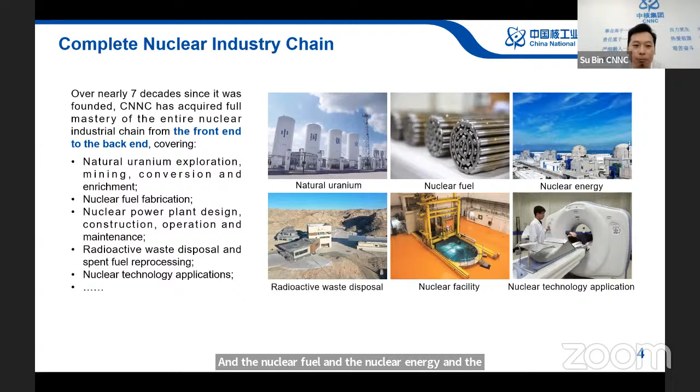For nuclear power development, CNNC has constructed many types of reactors from generation 2 to generation 4, including CNP300, CNP600, CNP1000, HPR1000, VVER, AP1000, CANDU 6, ACP100, and HTR-PM. For CNP300, CNP600, CNP1000, HPR1000, and ACP100, HTR-PM, it is from CNNC. CNNC has totally intellectual property and design of these reactors.

VVER is from Russia, and the AP1000 is from American. CANDU 6 is from Canadian.

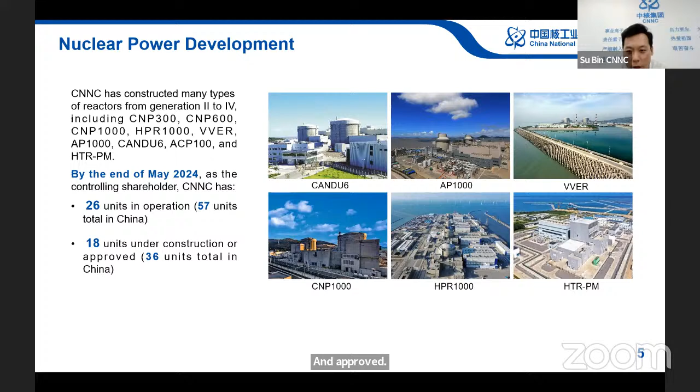So up to now, by the end of May 2024, as controlling shareholder, CNNC has 26 units in operation, out of 57 units totally in China. Under CNNC, we also have 18 units under construction and approved, out of 36 units totally in China. As a state-owned company, and on behalf of the China government, for nuclear development, we have adopted a 3-step strategy.

The 3-step strategy for nuclear energy development is thermal reactors, to fast reactors, to fusion reactor. You can see that we have 3 steps.

First is the thermal reactors, which use uranium-235, mature technology, and broadly constructed. The second is fast neutron reactors, which use uranium-238, which has a high efficiency utilization rate of uranium resources, and the spent fuel is greatly reduced.

The third step is fusion reactors. Fusion reactors have the highest thermal efficiency and no risk of accident, such as supercritical or fuel melting. We used to call the fusion reactor a small sun.

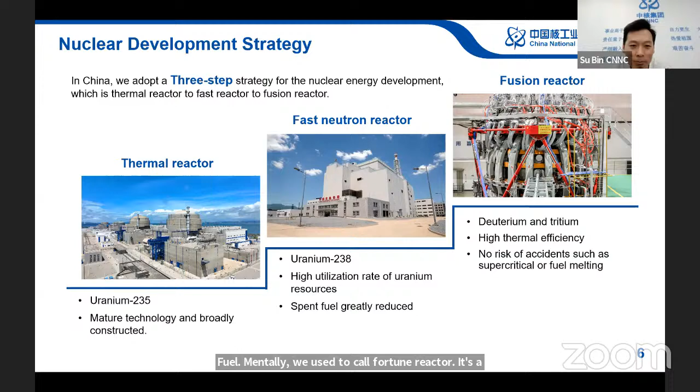CNNC Overseas was founded on April 25th, 1983. The name is China National Nuclear Corporation Overseas, a wholly owned subsidiary of CNNC. It is a leader and designated platform specialized in overseas marketing development of the complete nuclear industry chain.

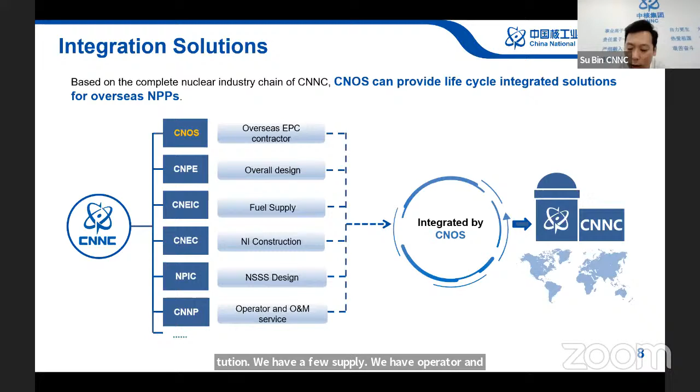So we have an integrated solution. Under CNNC, we have a construction company, a design institution, fuel supply, and operator and services. So we can provide complete services for our international partners.

Over the past 40 years, CNNC has successfully exported 1 research unit and 6 nuclear power plants in the international market. Especially, we have exported 6 units in Pakistan, and we have built 2 nuclear bases in Pakistan. The total installed capacity of nuclear in Pakistan is 3,505 megawatts, and the generation capacity is around 20 to 23% of total energy.

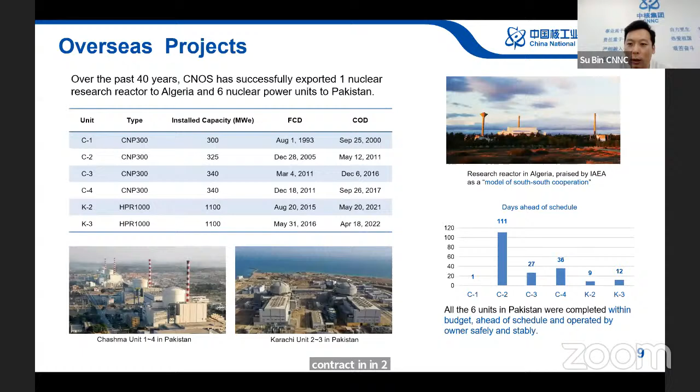Also, by the way, we also export 1 unit in Argentina. We signed a contract in 2022. And also we have research reactors in Algeria, Nigeria, Iran, Pakistan, and other countries.

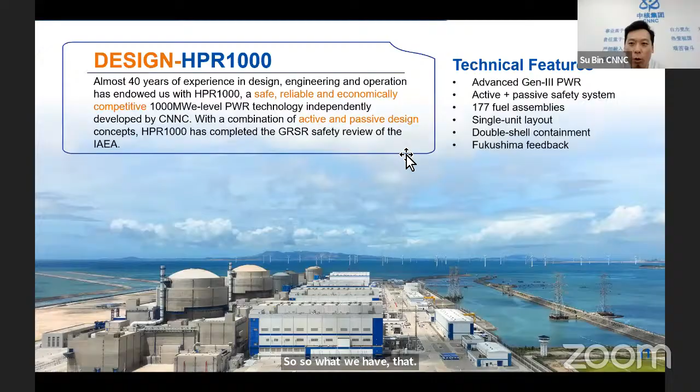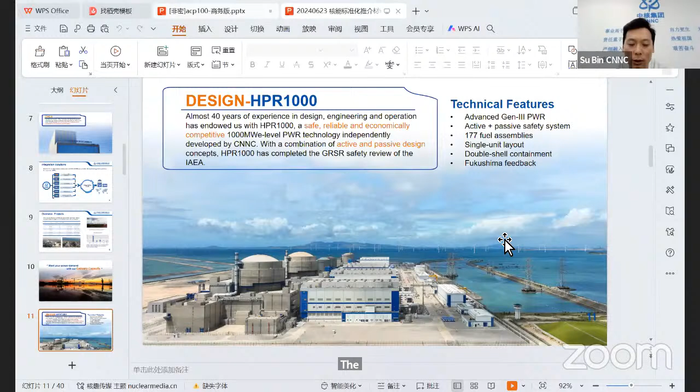So what we have is that we can provide a big unit like HPR1000. The designed capacity is around 1,200 megawatts, and we also have a successful demonstration plant in China and overseas.

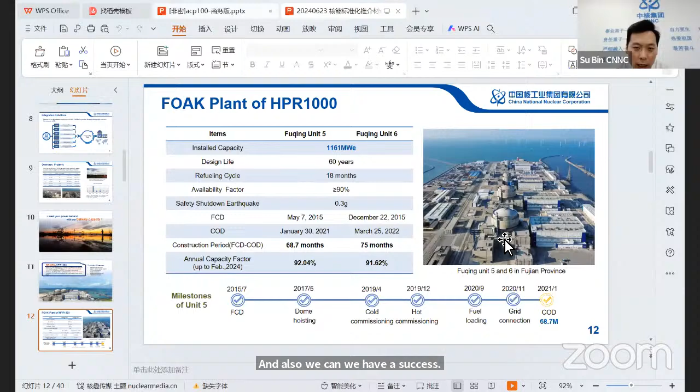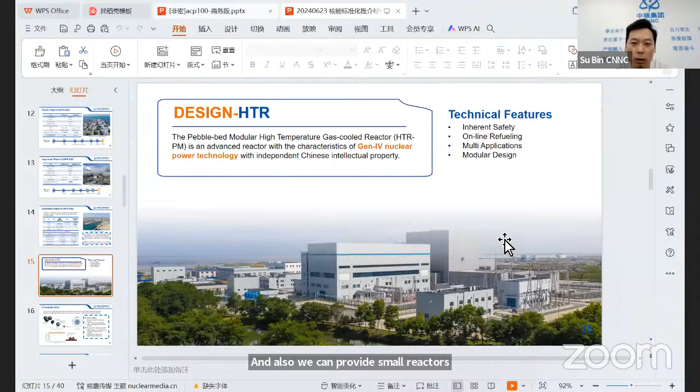We can also provide small reactors like HTGR. We have a demonstration plant in China, in Shandong province. And also we have ACP100.

ACP100 is basically a new generation of small and elegant NPP developed.

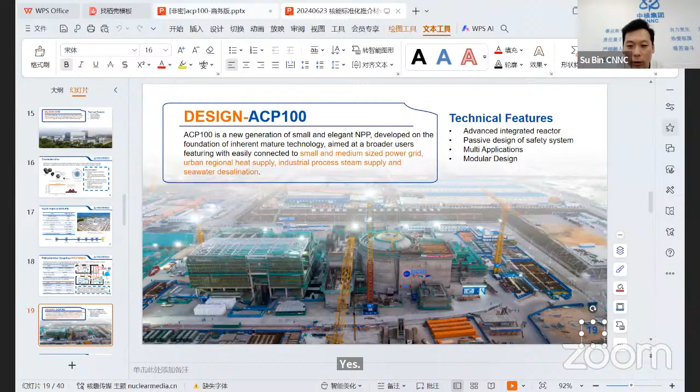Okay, so for ACP100, it is a new generation of small and elegant NPP developed on the foundation of inherent mature technology, aimed at broader users, featuring easy connection to small and medium-sized power grids, urban region heating supply, industry process steam supply, seawater desalination, and even hydrogen production.

For ACP100, I have to emphasize that it is the first SMR in the world approved by the IAEA. It is constructed in China, in Hainan province, and this SMR is going to get commercial operation by the end of 2025. Currently, it is under the commissioning stage.

For the SMR technology features, we have multiple technical features. The first is advanced integrated reactor. Second is a passive design safety system, which also has multiple applications and modular reactors.

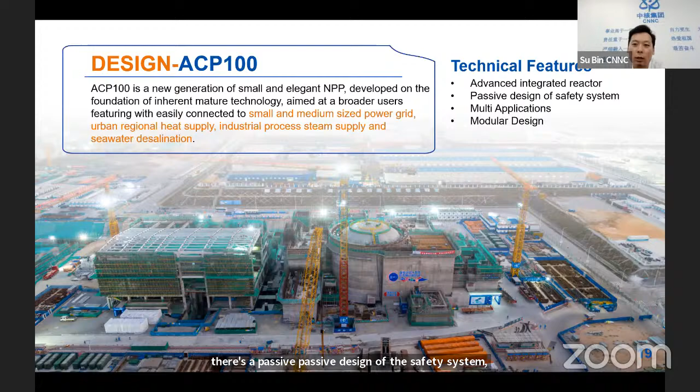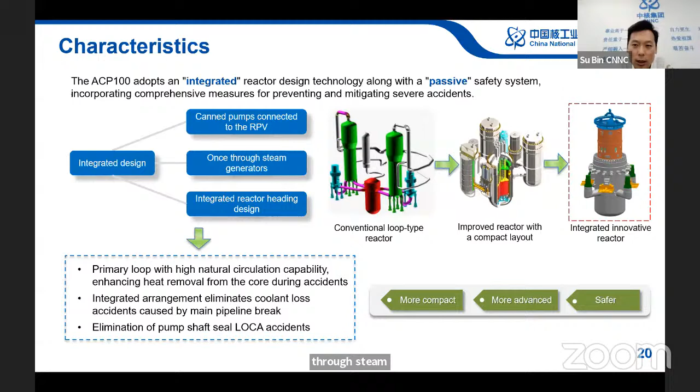So here, for the SMR ACP100, it adopts integrated reactor design technology along with the passive safety system, incorporating comprehensive measures for preventing and mitigating severe accidents. You can see here it is an integrated design, with the canned pump connected to the RPV, and a once-through steam generator in an integrated reactor heading design. You can see all of the design features here.

For the demonstration plant of ACP100 in China: installed capacity is 125 megawatts. Design life is 60 years. Fuel refueling cycle is 24 months, meaning once you fill in the fuel, you can continue running for 24 months. And the availability factor is more than 90%.

Safety shutdown earthquake design is 0.3 G. The FCD time, FCD being the first concrete date, for ACP100 in China in Hainan started from July 13th, 2021. The planned COD, or commercial operation date, is December 2025. The construction period is around 53.5 months.

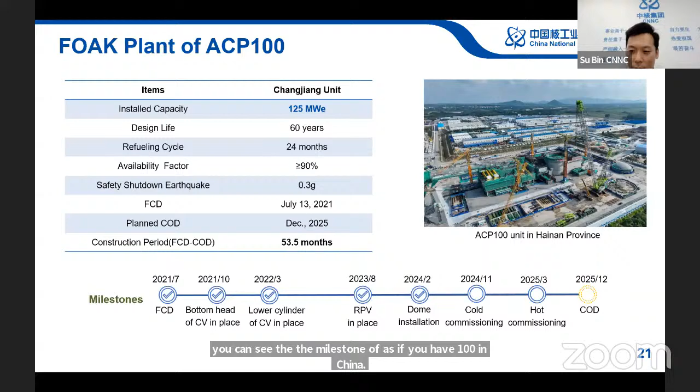You can see the milestones of ACP100 in China, starting from 2021, ending in 2025. For the function applications, ACP100...

For overseas projects, based on our experience in China and our nuclear power construction experience in foreign countries, we have concluded reference information for overseas ACP100. For a single unit, the construction period is 48 months, and for 2 units, the construction period is 60 months. The capital cost of a single unit starts from 8,000 to 10,000 US dollars per kilowatt, and for 2 units, the cost is around 6,000 to 8,000. The plant land size for a single unit is 25 acres, and for double units is 35 acres.

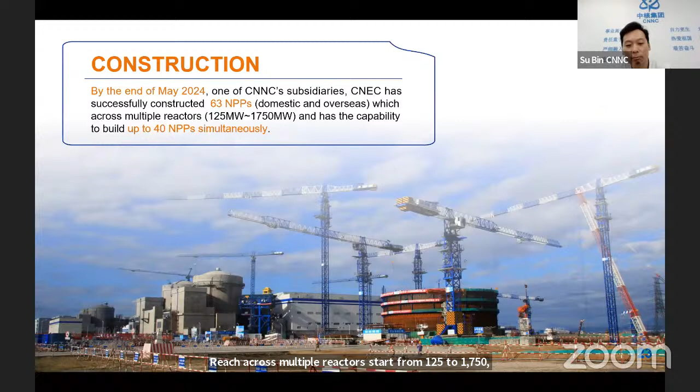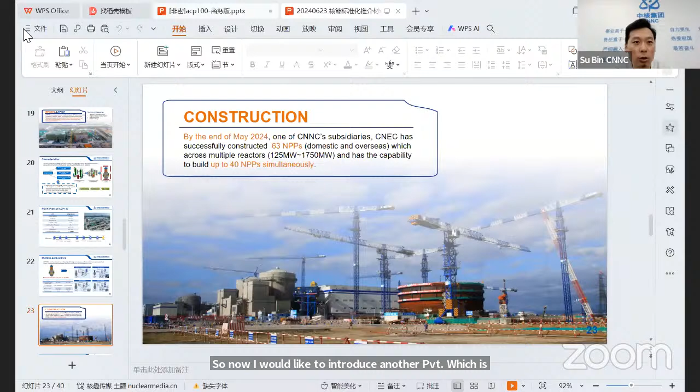Now I would like to introduce another presentation, especially focused on the ACP100. For the SMR ACP100, as we all know, the ACP small modular reactor is emerging as the future for nuclear industry development.

We have a common understanding that, given the global growth in electricity demand and traditional energy challenges, there is a need for carbon peak, carbon neutrality, and clean, low-carbon energy solutions to address traditional energy challenges. The IAEA, International Atomic Energy Agency, has proposed SMR as a key solution for the global energy transition, which can address global energy challenges through small modular design.

China is the first country to construct a small SMR in the world, symbolizing China's commitment to innovation. This marks a crucial breakthrough for China in the field of nuclear energy, setting a historical record for global nuclear energy development.

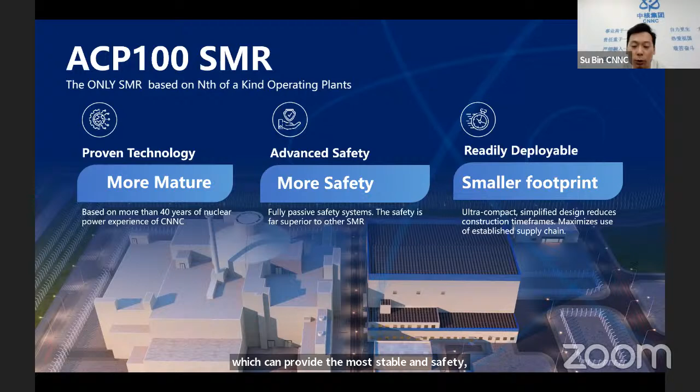For safety, the SMR has a fully passive safety system with high efficiency, which can provide the most stable and safe energy, and serves multiple purposes for both the country and the city.

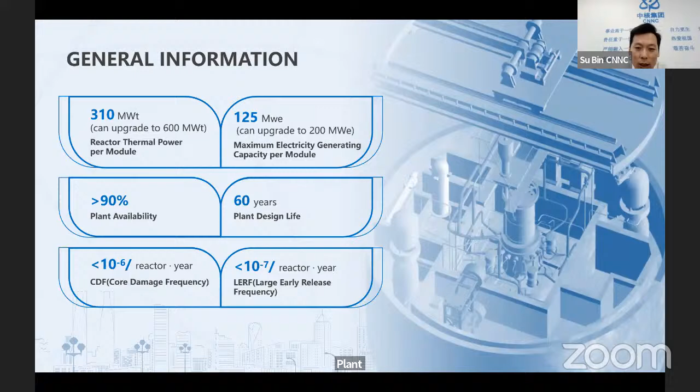We can see the general information for SMR, giving you a better understanding of design capacity, design life, plant availability, as well as core damage frequency and large early release frequency.

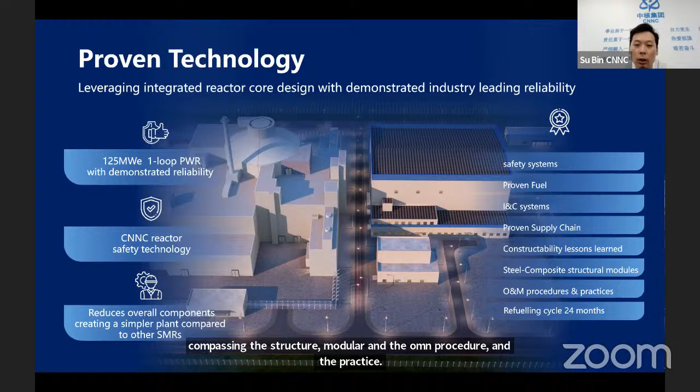This is the layout of SMR with relevant parameters. We can see the safety system and proven fuel, I&C instrumentation, proven supply chain, constructability lessons learned, steel composite structure, modular design, and O&M procedures and practices, with a refueling cycle of 24 months. This covers the basic specifications of the SMR.

As we can see, the design adopts an integrated design. For the ACP100, it has an integrated layout instead of a loop type, with the main pump directly connected to the reactor pressure vessel. The nuclear steam supply system is integrated into the reactor module, with an integrated head package design. The CRDM, pressure vessel, reactor internals, and canned motor pump are all mature technology.

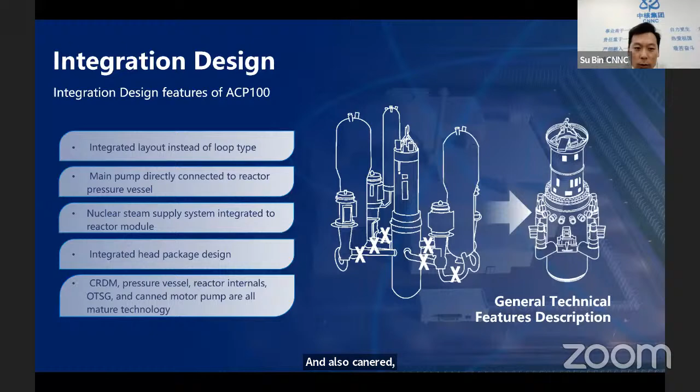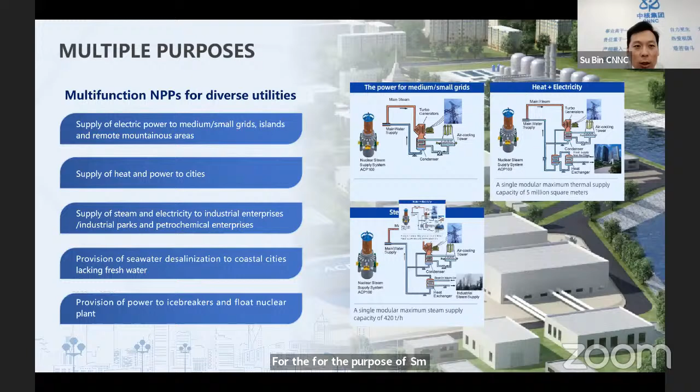For the purpose of SMR, we are content multiply purpose, as we can say multifunction NPP for diverse utilities: supply of electric power to small grids, islands, and also remote mountainous areas; supply of heating power to the city; supply of steam and electricity to industry enterprises and industry parks; and coupling with petrochemical industry enterprises.

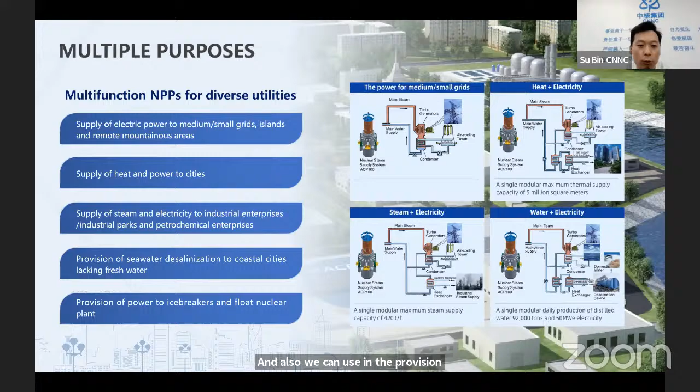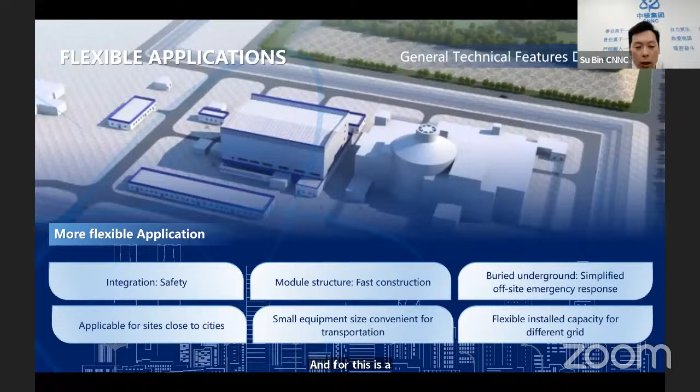And also we can provide seawater desalination to coastal cities and island cities lacking fresh water. And also we can use it in the provision of power to icebreakers and floating nuclear plants. So this is a flexible application for the SMR.

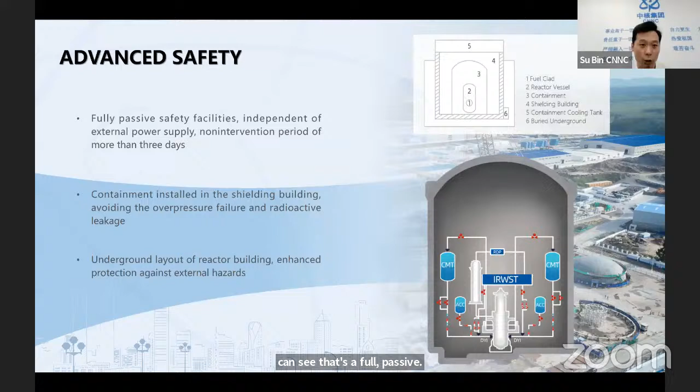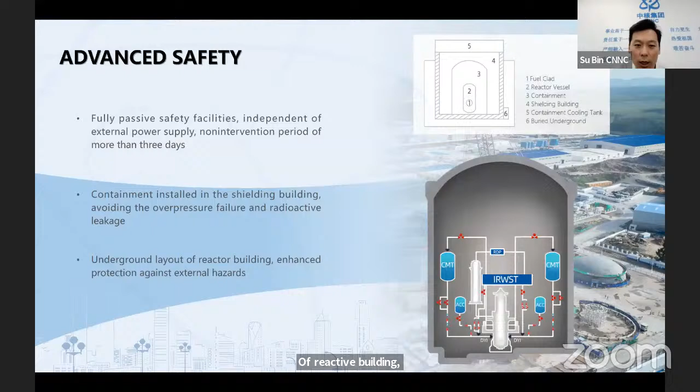Next, I would like to introduce the most advanced safety. You can see full passive safety facilities, independent of external power supply, and a non-intervention period of more than 3 days, and the containment installed in the shielding building avoids overpressure failure and radioactive leakage. And the underground layout of the reactor building enhances protection against external hazards.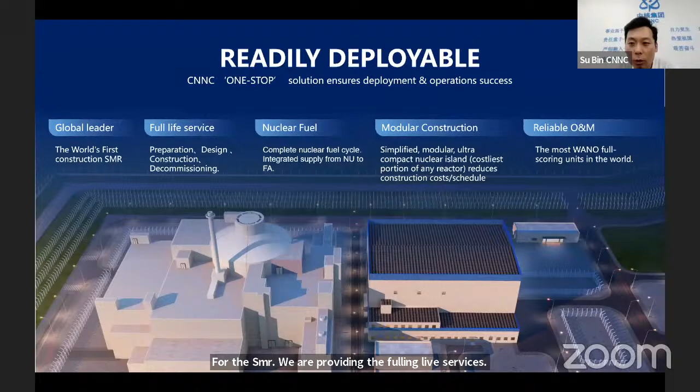You can see here, as we are showing, the reality and deployability of the SMR. We are providing full life services, nuclear fuel, modular construction, and reliable O&M.

So for the demonstration of ACP100 in China, as we can show here, it is the first SMR in the world to pass the IAEA safety review. It started in 2016, then in 2021 we started FCD, then in 2023 the modular reactor core hoisting was complete, and in 2023 the steel has been complete.

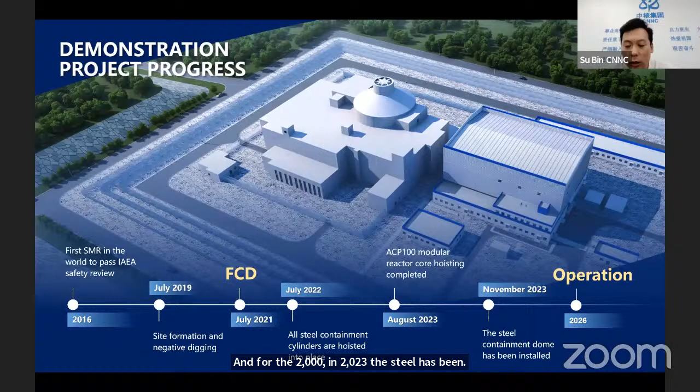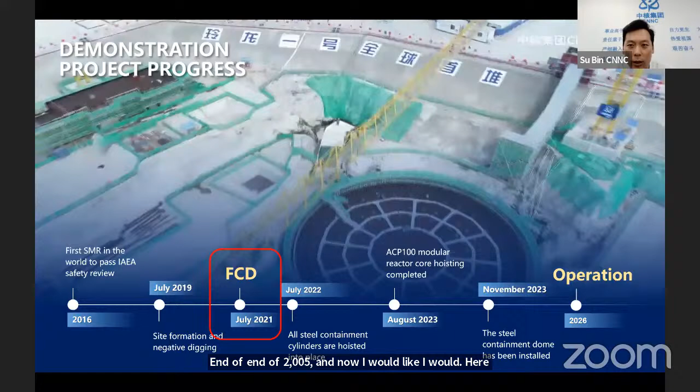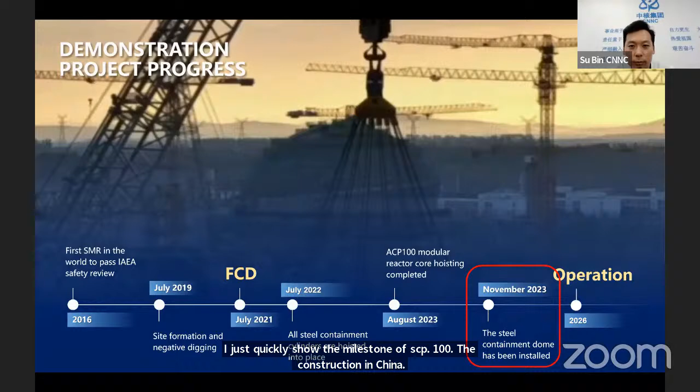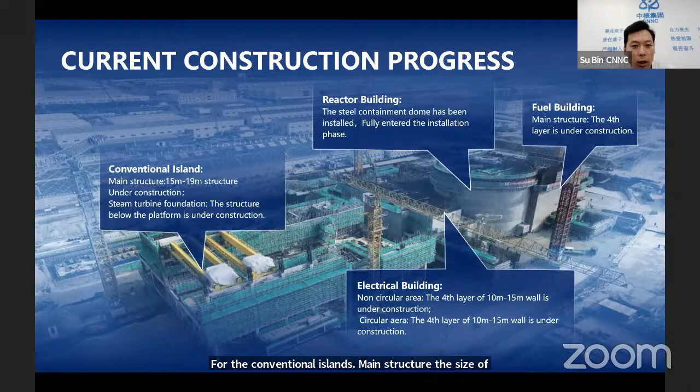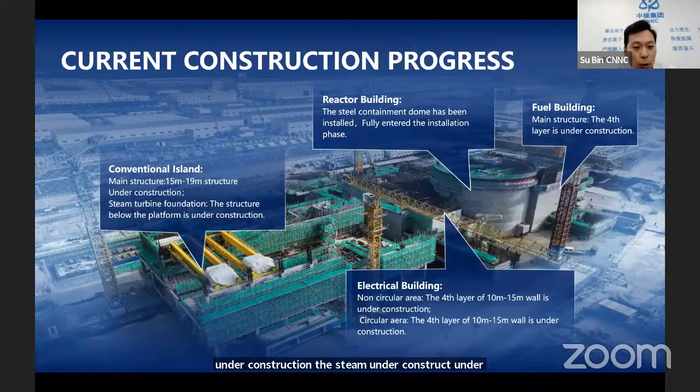And here I would like to introduce. You can see the conventional island main structure; the size of the main structure is from 15 to 19 meters. Under construction, the conventional island contains the steam turbine foundation, the structure below, and the platform. Actually, these are previous construction pictures. We want to show you the general layout of SMR in China.

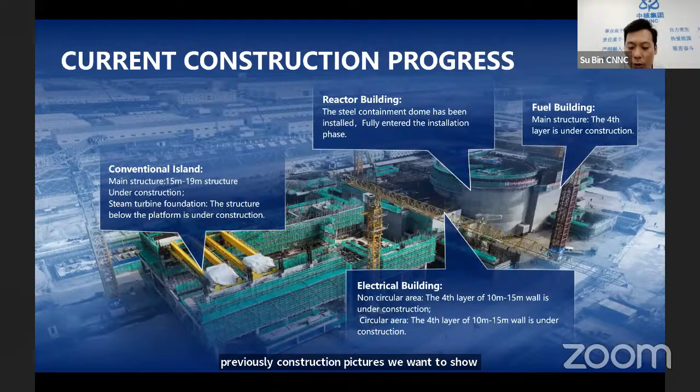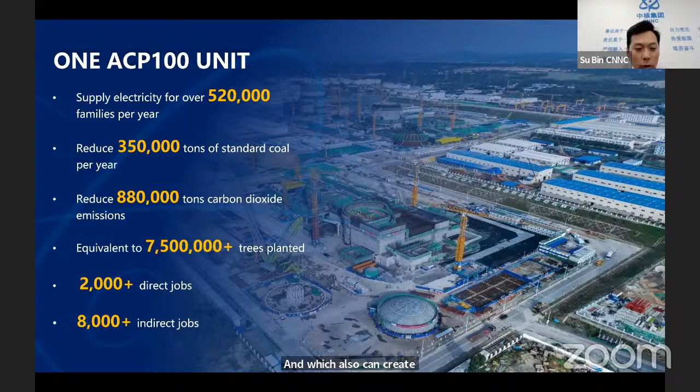And for the advanced benefits of ACP100, it can supply electricity to over 520,000 families per year, reduce 350,000 tons of standard coal per year, and reduce 880,000 tons of carbon dioxide emission, which is equivalent to 7,500,000 trees planted, and it can also create 2,000 plus direct jobs and around 8,000 plus indirect jobs.

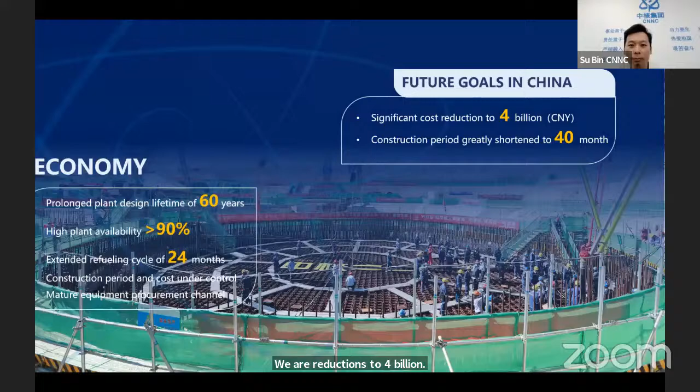And in economic considerations, the ACP100 plant design life is 60 years, and the plant availability is more than 90%, as I explained before. For future goals in China for ACP100, significant cost reductions to 4 billion, and the construction period shortened to 40 months. This is advanced, which I already explained to you before, so I will not give more explanation.

By the way, I will emphasize that CNNC has a complete industry chain. We can provide a comprehensive, integrated regional workshop on technology development and the application of small modular reactors in the global world.

So this is a summary of SMR. We are confident that CNNC has accumulated a lot of experience in the construction of small modular reactors, including site selection, safety review, equipment manufacturing, civil engineering, and operation. CNNC is willing to share the experience with member states in the near future.

Well, I think your presentation is always impressive because you show us the progress of China, building many NPPs at the same time. And my question is: are there any anti-nuclear movements in your country? This is very important for us because we failed to implement the nuclear energy program in Indonesia, one of the reasons being the anti-nuclear movement in the past, some anti-nuclear demonstrations.

And do you have any public acceptance program for this kind of nuclear energy program, for example, to explain and make everyone, the common public, understand that with nuclear there is a risk, but many benefits? This is my first question: is there any public acceptance program, dissemination, or promotion?

The second one, you also showed us your history of collaborating with many countries: CANDU with Canada, VVER with Rosatom Russia, and AP1000 with Westinghouse United States.

How do you make a transfer of technology so that then you can make your nuclear power reactors by yourself? Is there any program by the government, by the central government, for example, for every foreign vendor to have a significant transfer of technology or something like that? Please, if you have any explanation on these two questions.

Thank you. Yes, so I will first answer the first question, about nuclear program development in China. Usually we have the following steps. First, the government has to make a plan for the development of nuclear power. Every year there is a central government meeting. All state members, around thousands of people, will review the country's energy and nuclear energy development. First they will review and make a plan, and they will pass the development of nuclear energy.

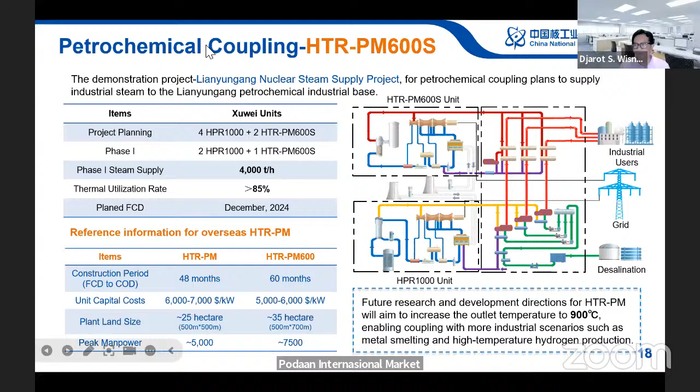So, I'm curious about your answer on the specific technology, because the ACP100 is a PWR, right? Yeah. We know that there are some big problems with PWR because there is water inside the core of the reactor, but in the HTR-PM there is no water because it uses helium, right? So that means more safety and enhanced passive cooling.

So could you explain specifically the technology of your ACP100? Like the efficiency, the significance of the technology, the significance for safety, something like that.

This I think I already explained before. Sorry, I can show you the document for ACP100. Okay. You comment.

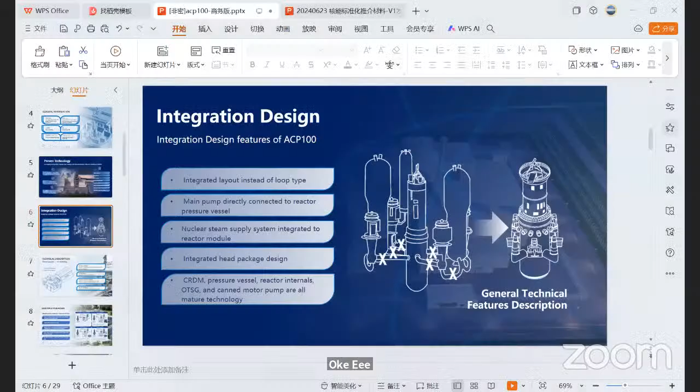Yes. Right now, you can see this is the design of ACP100. You can see here the layout and also the design features. It is an integrated layout instead of loop type. It's more safe, and the main pump is directly connected to the reactor pressure vessel. It's directly connected, and also the nuclear steam system is integrated into the reactor module.

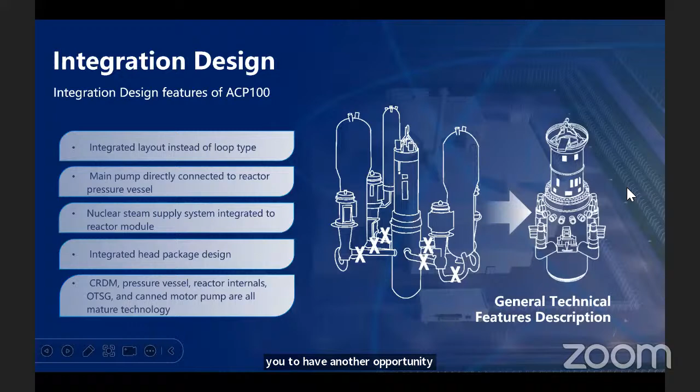You can say everything is in the modular reactor, and it is in one container. So you don't need to have another auxiliary building for the smaller reactors. And I'll show you the next features also. And yes, you are right.

It is using water cooling, and everybody worries about maybe leakage and high radiation in the water. But there are three channels for water cooling. The first channel will be fully processed by chemical input, and it will reduce and resolve all irradiation. Then it comes to the second channel, with another process system, and then the third channel. It will be completely isolated, with all safety considerations.

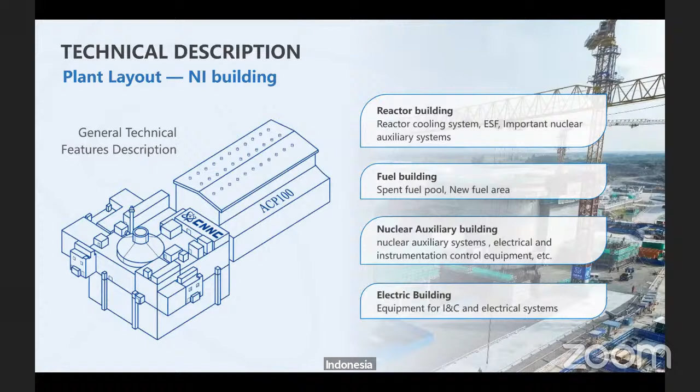And for the HTGR, you are right that it is using gas cooling. But the disadvantage of HTGR is the fuel, because the fuel cost is high, and also the fuel cannot be reutilized in the future. This is the disadvantage of HTGR. Okay, I think each type of technology has its own advantages.

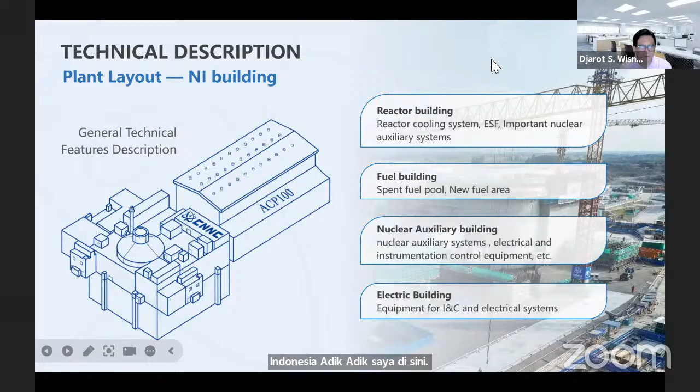But it is good to know both technologies, the high temperature gas-cooled reactor and the pressurized water reactor, are well developed by the Chinese. If in the future you want to produce hydrogen, maybe you want to use the HTGR, and you can still make electricity while using it for hydrogen production.

But there is one question from the audience on YouTube, from Dr. Suparman, I think. He is an expert on nuclear energy economics. You showed us the unit capital cost of the ACP100 around 6,000 to 8,000 US dollars per kilowatt, isn't it? And his question is, how about the electricity cost or electricity price if you sell it outside?

Okay, for the cost of ACP100, that depends on 1 unit or 2 units. If you construct 1 unit, the cost will be high compared with 2 units. For a single unit, now it is around 8,000 to 10,000 US dollars, and for 2 units the cost is around 6,000 to 8,000.